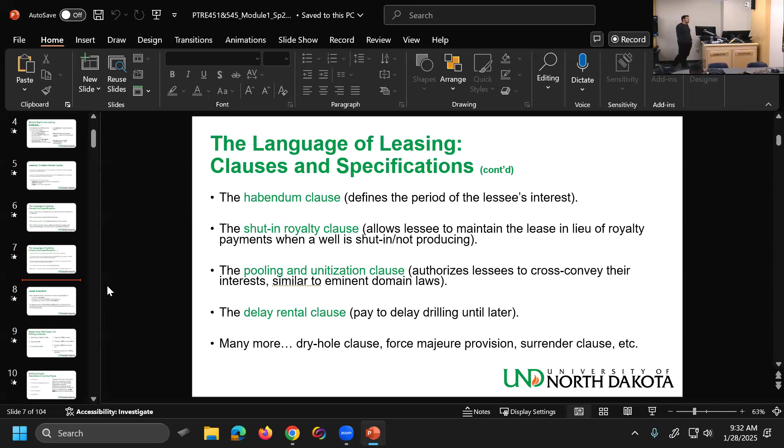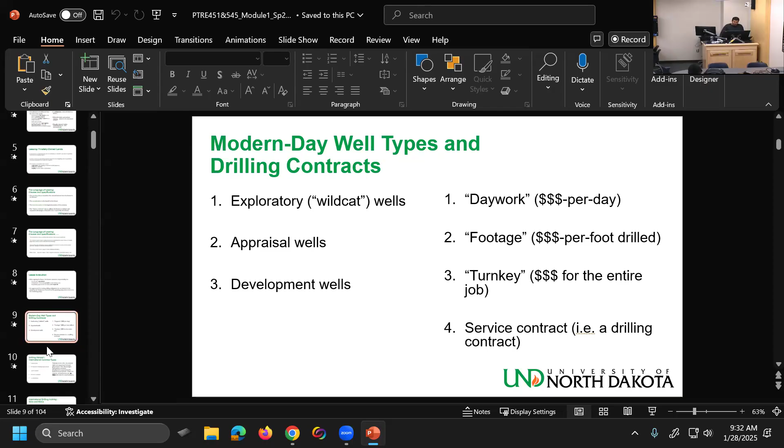Last time we finished talking about contracts. We talked about leasing, then basically international agreements that have to cross borders, and then drilling contracts per se, like between an operator and a drilling contractor, or even a landowner and a drilling contractor. And then we talked about IOCs and NOCs. I expect you to know the difference between the two.

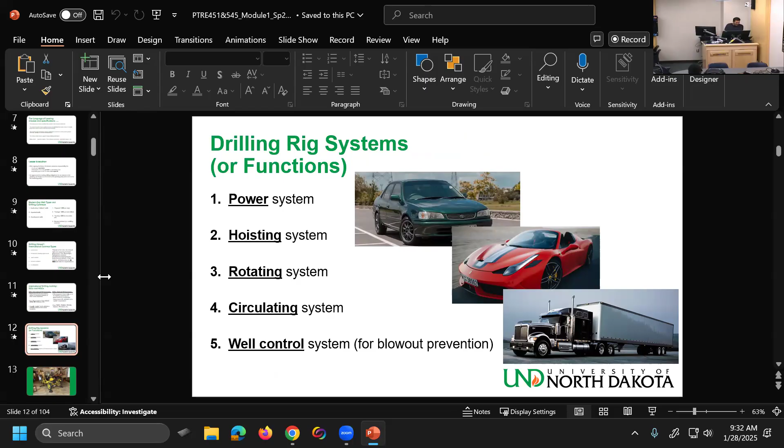And then we started talking about the basic functions of a drilling rig, some things that they all have in common even if they don't look alike. And then we talked about the personnel, the main personnel — that is much more than what this slide has, of course.

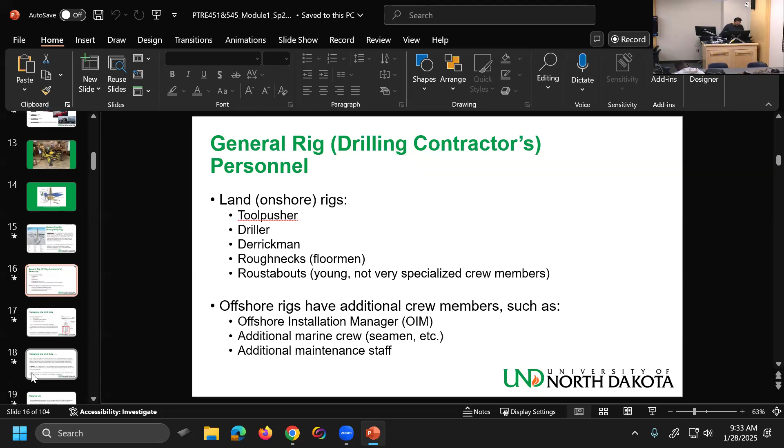And then we talked about the first activities that take place when you're beginning your drilling operation. We said you rig up and then you spud in. Spudding in is an old word — actually, it's not British, it's an American word, I think. But it has to do with potato.

It was really the act of, back in the day with the cable tool rig, lifting the bit and dropping it down for the first time. That was basically spudding in. That's why you spudded your well on, say, January 28th, 2025, and then TD'd it — reached the total depth — on February 15th. TD is like the checkered flag, total depth.

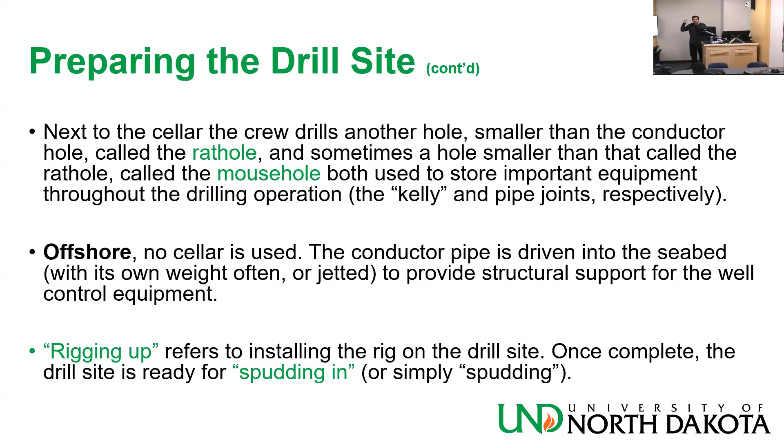Rigging up is when you install your equipment. For some people that work for operators or drilling contractors, rigging up is a big thing, like rigging up the whole rig. For service companies — and there are more than 100 service companies involved even in an onshore operation — rigging up might just mean installing their own equipment, and they tell their boss, hey, I rigged up, everything's okay.

You have the substructure, which is under the ground, basically in the cellar, and is holding up basically the whole rig. Ultimately it's centered over the conductor pipe in the cellar. The substructure will support the derrick, mast, pipe, drawworks, and sometimes even the engines. So it's supposed to hold a big mass — it's a no-joke equipment. It's the foundation on which your rig is temporarily built.

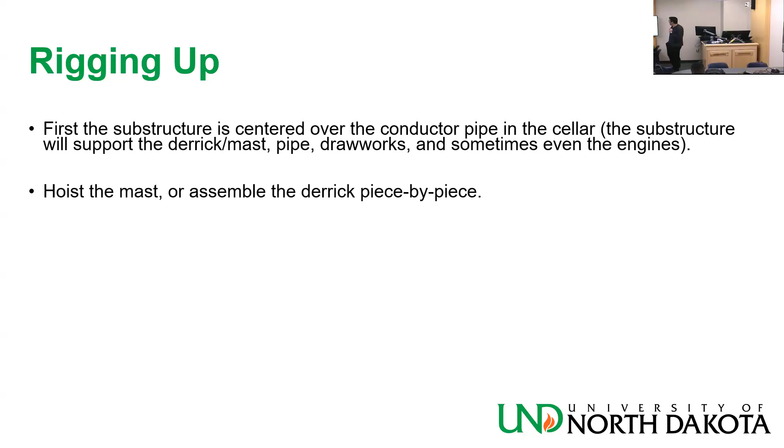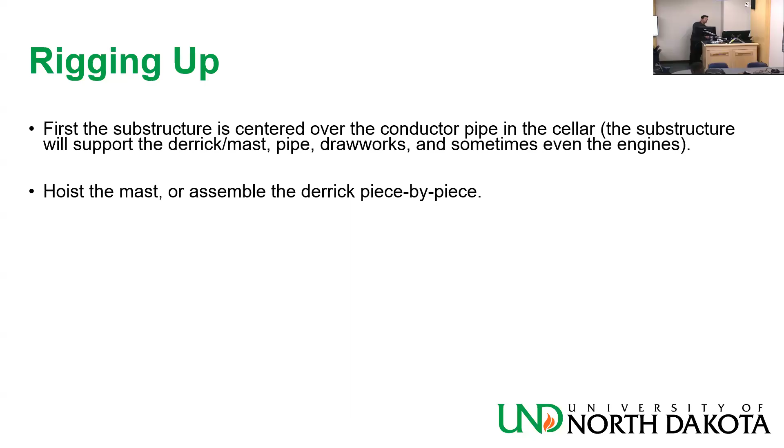You're going to hoist the mast — the mast is a collapsible version of the derrick — or assemble the derrick piece by piece. The mast is basically a derrick that is not a permanent structure. It's easier to transport in the sense that you don't need to move the whole thing — you can bend it down and transport it with a semi, or even break it into several pieces and transport it in containers.

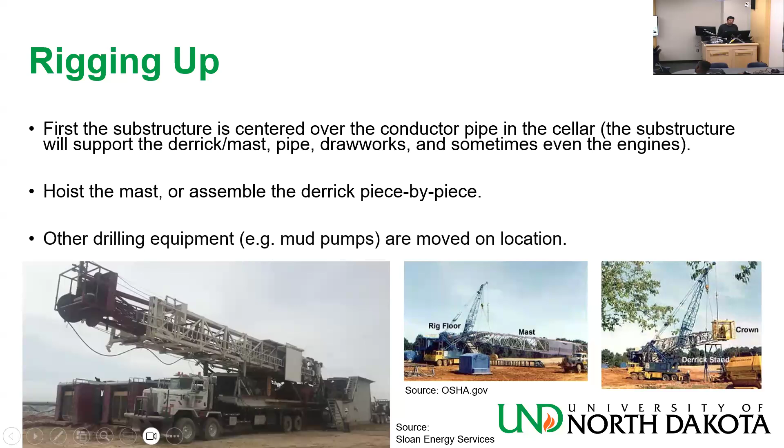And then you have other drilling equipment moved to location, like the mud pumps, the drawworks — we're going to talk about those. Those are heavy equipment, the heavy stuff that you need to take special care of.

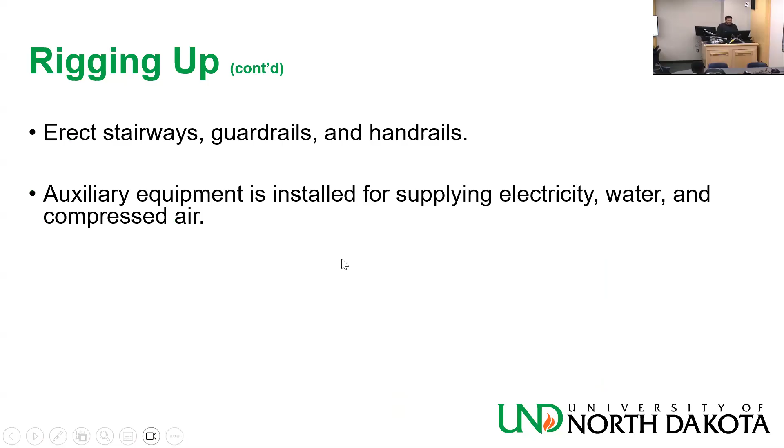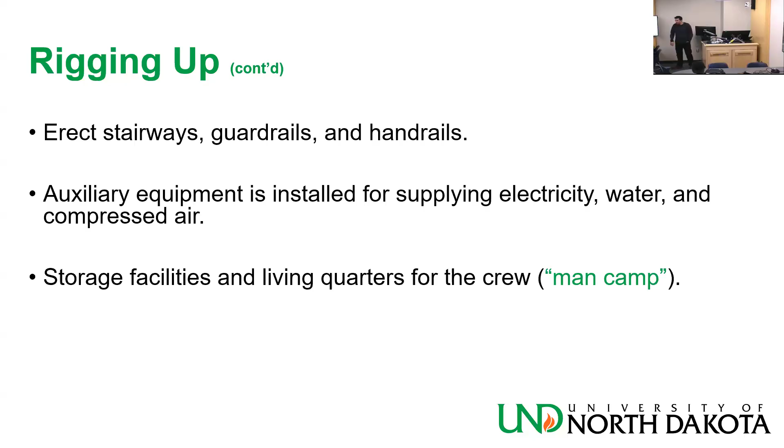You erect stairways, guardrails, handrails — these are small stuff. Auxiliary equipment is installed for supplying electricity, water, compressed air, storage facilities, and living quarters for the crew. They're called the man camp — I used to call it the trailer camp — basically containers that are like apartments inside, several of them.

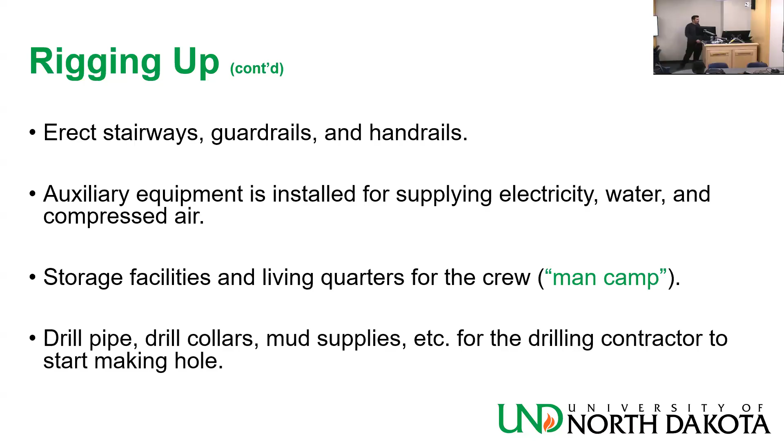Then you bring equipment that you're going to need for the drilling, like drill pipe, drill collars, mud supplies, for the drilling contractor to start making hole. And then you spud in, which is basically the beginning of the drilling operations for a well.

It originated from the cable tool era, when spudding was the act of hoisting the drill stem and letting it fall freely. The force of the drill bit hitting the bottom, hitting the rock, was sufficient to break it, and that was basically the first act of drilling with a cable tool rig.

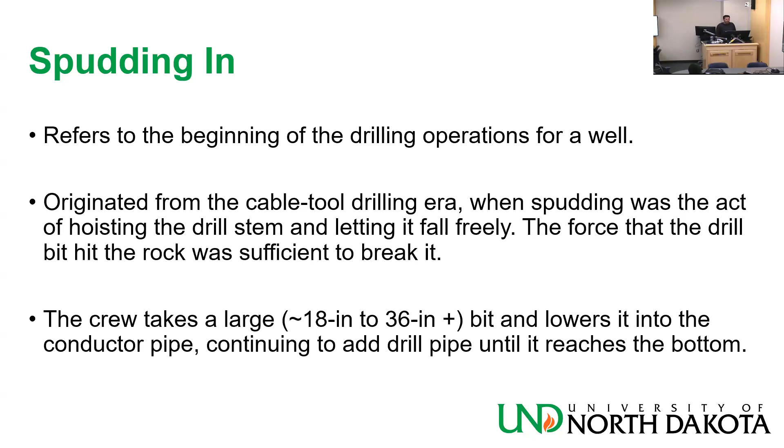Now we use rotary rigs, so it's basically you start rotating, applying weight on the bit — that's when you're spudding. The crew takes a large 18 to 36-inch bit and lowers it into the conductor pipe, continuing to add drill pipe until it reaches the bottom, starts rotating clockwise, and we call this making hole — basically you have a positive ROP, rate of penetration into the earth.

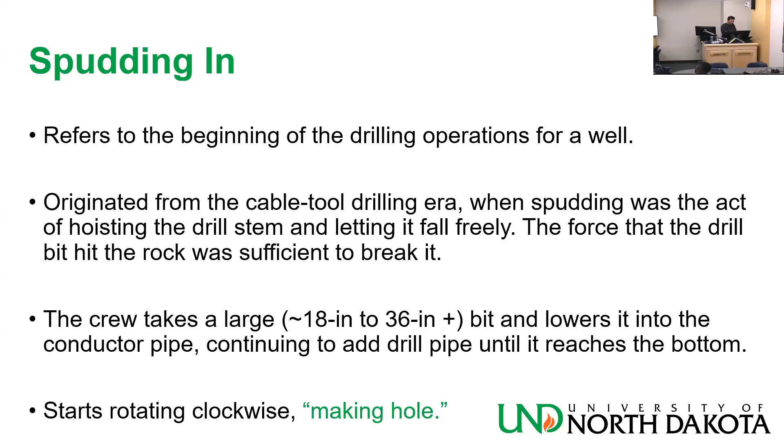Making hole is basically a term that we use for when we are making hole. We are really operating and extending our well. There's some important equipment here that we will talk about.

The derricks are either 90 feet or 100 feet, or 35, 40 feet. The 100 foot derricks are able to pull out of the hole, or even trip into the hole, stands, which is like triples, 3 joints together, 30 each, 90 feet. You're allowed to pull 3 of them together, or pull down 3 of them together. The old 40 foot tall derrick can only do one stand, one joint of 30 feet.

There are joints that are 31 feet, a little bit longer, a little bit shorter, etc., etc.

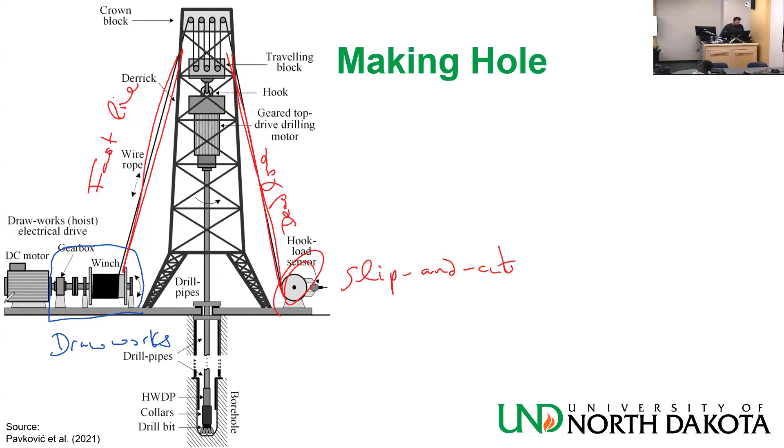If the crew members measure the mud weight coming in, the mud weight going in, and the mud weight coming out, they put it on the screen every few feet or so. So everybody has access to this data on the rig. It happens depending on the operator's or the rig owner's policy, I guess.

Sections of drill pipe above the bit are screwed together in a drill string, connecting the bottom hole equipment to the surface equipment. These are basically the drill pipe joints. One joint is something between 30 to 33 feet.

One stand is 3 joints, so it's something like 91 to 95 feet, can I say? Something like that, can be 89, somewhere there. That's why the height of the derrick is 100 feet or 40 feet.

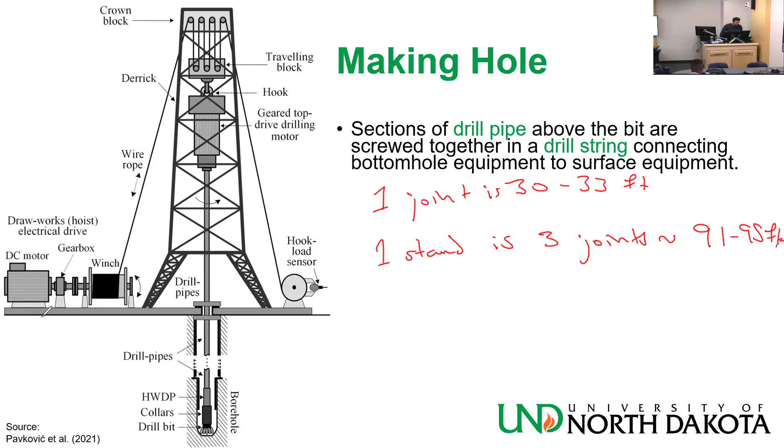The drilling crew keeps adding lengths of drill pipe while making hole. Now remember I told you the rig may have a capacity to pull in, pull out, or run in stands, which is 3 joints together. But when we are drilling, when we are actually making hole, you are going in one joint at a time. The joint that is about to go in is in the mouse hole. It goes from the rack to the mouse hole, and then from the mouse hole down the hole, down the actual well.

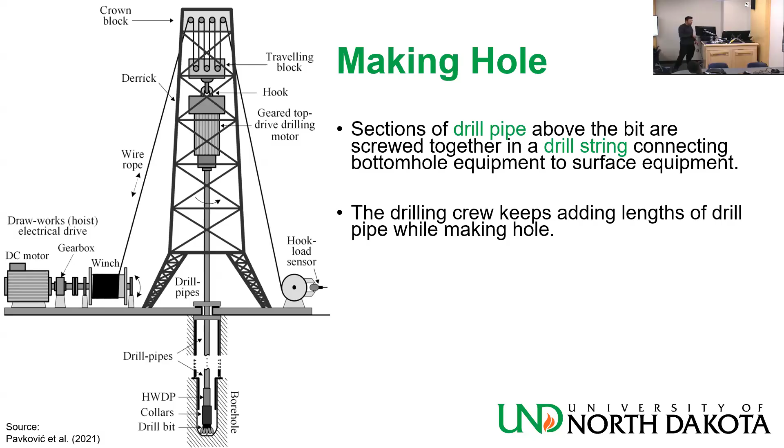Periodically, drilling is stopped and steel pipes called casing are lowered into the hole and cemented in place. Drilling carries on with a smaller sized hole below the casing shoe. So every time you run casing, you cement it, and then you go back in with a smaller bit and drill through that and carry on the well. So it's to your benefit to do as low a number of casing strings as possible.

Basically, you don't want to do many casing strings in the sense of going from big to smaller, smaller, smaller. Then when you reach where you want to produce from, you have a very small hole, and you cannot run anything inside, like a pump. So you need to make sure you don't misplan your well and end up unable to produce, because you need to know what you are expecting to produce, flow rate wise, etc.

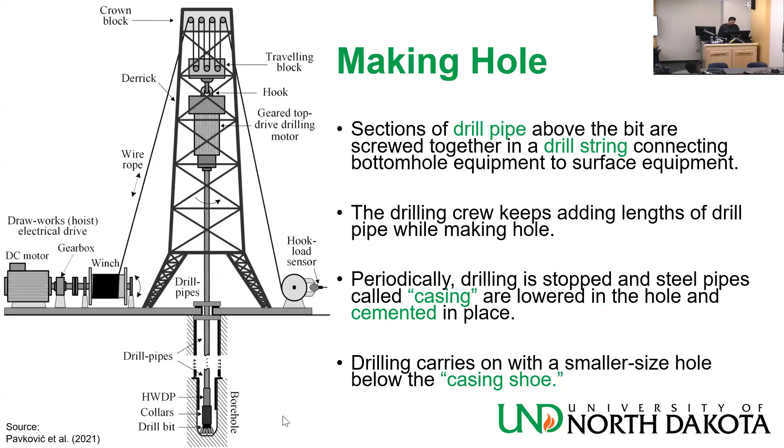There was a well in the Gulf of Mexico, I think it was called the Blackbeard. It had 14 strings of casing inside, so it started very big and ended up tiny at the production zone. When we do the last module, I hope we have time to cover managed pressure drilling, where we'll talk about a technology called dual gradient drilling that helps you offshore use fewer casing strings than you would have otherwise. It's a very cutting edge technology used for that.

The power system. So we're going to look at the power.

Let me quickly ask a question. What influence or what informs the decision of, do I need to drill now, instead of using many casing strings, why not just use one and then change it to the production? Is there a decision whereby you use one and you change it to this?

Have you seen mud windows before? We are going to see this in this module, but do you know about mud windows? Mud windows, mud windows... No? Okay, we're going to see those. We're going to see about casing design.

Basically, it's not completely in your control. You can use mud that has a certain weight. It cannot be lower than this, cannot be bigger than this. And that dictates how many casing strings we are going to use, and also how deep we are going to run each one. We're going to see that maybe in 2 weeks' time, maximum 3 weeks, in this module. It's a good question, yeah, we're going to see casing design.

But there are other things, like these modern day technologies I mentioned, that play with the windows a little bit. What is the variation of your mud weight that's possible? You want the biggest variation you can get. If you have a very narrow mud window, it means your mud weight cannot be bigger than this, cannot be smaller than this, so you have very small flexibility. If you make a little mistake or something goes wrong, you're in trouble. You want to make it as big as possible. There are smart technologies that passively try to achieve that.

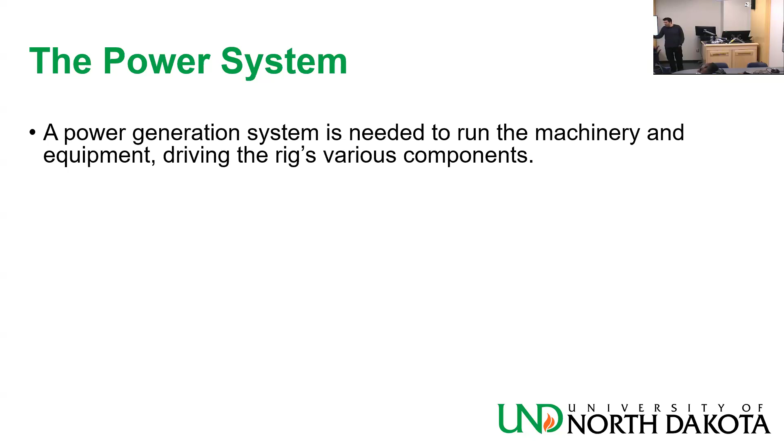In fact, my old advanced drilling professor joined an industry project—it was like the name of his research group, basically. It was called Wider Windows, because they were trying to look into technologies that widen the windows. You want wider mud windows. The undergrads from this class should have seen mud windows before and understand what I'm saying now. They did casing design last year, module 3, I think. But we're going to see that again in this module soon.

The power system. The power generation system is needed to run the machinery and equipment driving the rig's various components, plus auxiliary power requirements for lights, etc. It sounds small and insignificant, but it's important. You need lights, you need clean water, you need a bunch of supplementary or auxiliary stuff. They're still needed, but not necessarily for drilling the hole directly.

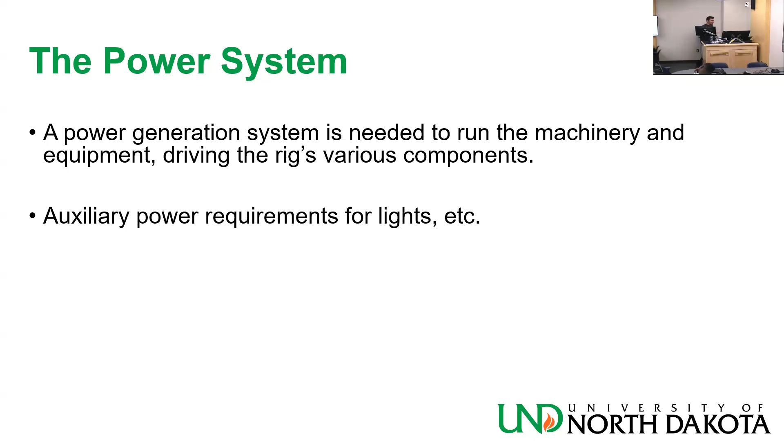But the main things, the two equipment that require the most power on the rig are the mud pumps and what I described earlier, the blue thing, the drawworks. These are the ones that are the most power consuming pieces of equipment on the rig.

Offshore rigs, you are basically on a ship, and you need thrusters, propellers facing against each other, that are used to keep the rig in place. They are also very power intensive. Tremendous total power requirements, exceeding 50,000 horsepower.

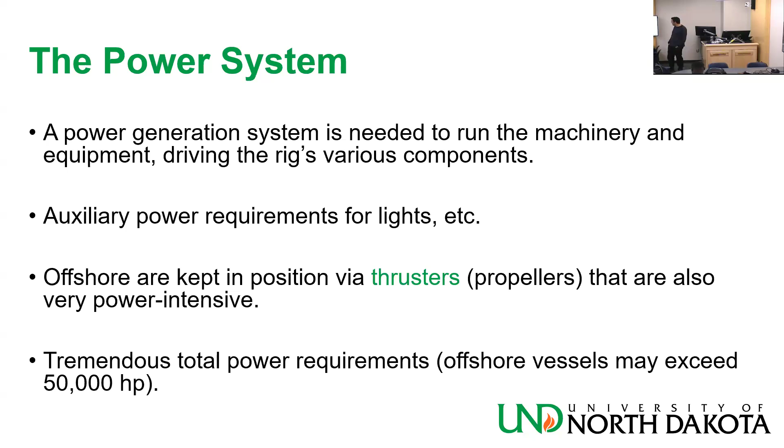Where is the rig's power coming from? We have compression ignition diesel engines. That's the most common source.

If you're familiar, if you drive a gasoline car, the pistons compress the fuel. It mixes gasoline with air, and the mixture enters the pistons. The piston compresses the mixture, then you have the spark plug, which induces current in the mixture, and it makes it burn or explode and moves the piston down, creating motion.

Diesel is a little bit easier in the sense that you compress it and it ignites on its own, basically. You don't need spark plugs, which is good for the people working, they don't need to replace any of the spark plugs.

These days, you have natural gas and liquefied petroleum gas engines that require spark ignition. These are harder to transport than diesel engines, and they are more complicated. Also, when gas is involved, it means having gas under pressure, which is very dangerous. You are in danger of explosion, and other stuff, and they are in general less safe.

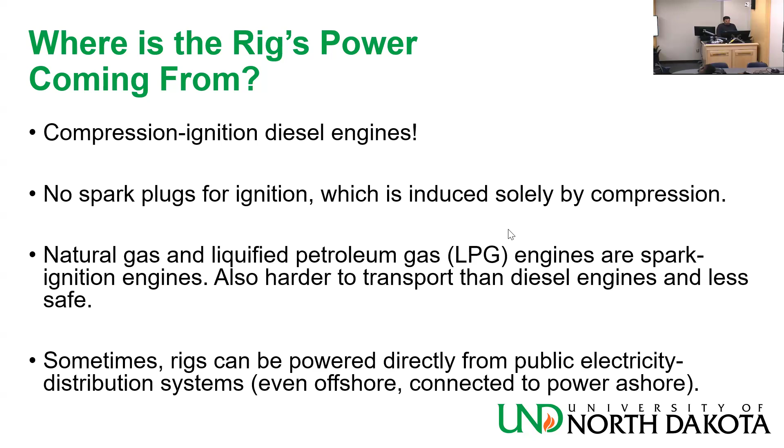Any questions? Feel free to cut me off. Sorry - on a particular rig, is there a situation whereby you have a combination of this power supply?

No, not to my knowledge, because components that are downstream of that will have to be different. Like the transmission, we're going to talk about it a little bit later, but the diesel engine makes chemical energy into mechanical energy, which is motion, or electricity. How do you transmit that down to the rest of the equipment?

You will need some differences there. Generally every rig is designed for a specific type of source. You can have things working on an AC current, things working on a DC current, but generally speaking, it's impractical to have rigs that work on 2 different sources. But I can imagine people designing rigs that can do that at some point, if it makes sense.

I haven't been in one that had that, in fact, all the rigs I have been through, they had diesel engines, to be honest, that I actually worked on. They had diesel engines. And that was in the Permian, either on the West Texas side or the New Mexico side. It was diesel.

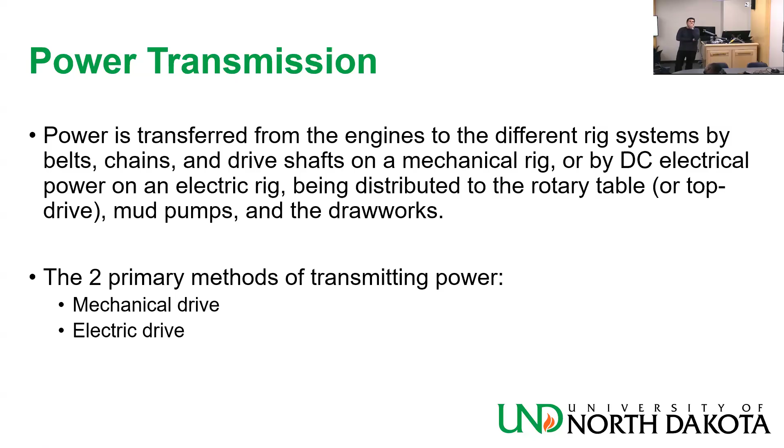There are some disadvantages with a mechanical drive, in that everything needs to be aligned a certain way, because you have pulleys and belts that need to be aligned a certain way. You lose the alignment and you are in trouble. You might not only lose the motion, you might actually cause very big, expensive damage. This is a problem they had back in the day. With the electric drive, you are more flexible, but it's more high-tech equipment that you are dealing with, and the electricity demands are quite heavy.

In mechanical drive rigs, a compound is placed right after the engines, which is the collection of pulleys, belts, etc., connecting to the rig components that require power, such as the mud pumps and drawworks. So you have the engines, the compound, and then everything else on the rig that takes this power, like the drawworks and the mud pumps. The compound is basically where the moving parts are, and this is what needs to be aligned properly.

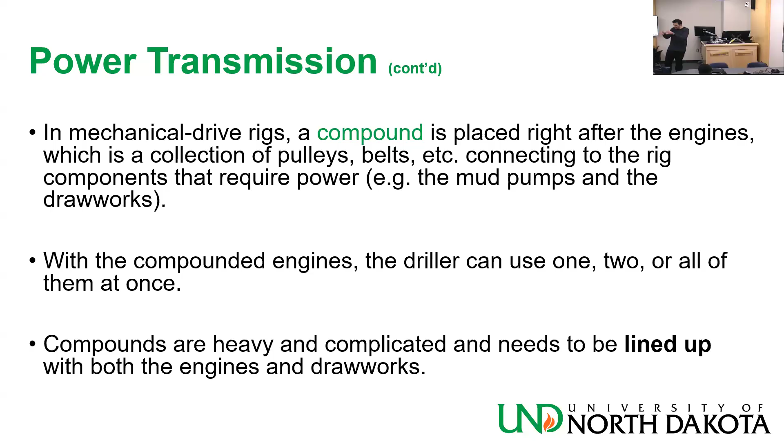With the compounded engines in mechanical drive rigs, the driller can use one, two, or three diesel engines in any combination they like. Compounds are heavy and complicated, and they need to be lined up with both the engines and the drawworks. This is the complication - if you lose the lining up, you are in trouble.

In electric drive rigs, the diesel engines produce AC, alternating current. They burn diesel and produce AC. Everything on the rig works with DC current, direct current. How do you go from AC current to DC current? A transformer, exactly. In the rig we have a whole container with transformers.

It's called the silicon controlled rectifier, and it's a very well air-conditioned room because they need to keep the temperature at a certain point. In the summer, everybody goes and eats lunch in the SCR container because it's cool - everywhere else is hot. If people get tired and it's too hot, they go into the SCR room. It's a very important room, because if something there breaks, you don't have electricity to the components of the rig. But basically, think of it as a gigantic transformer - it takes the power from the diesel to the equipment on the rig.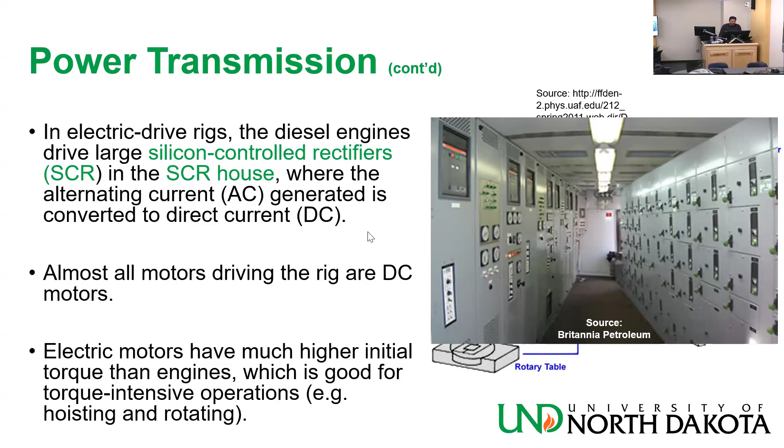And this is how it looks on the inside - the SCR room, very important. Think of it as a gigantic transformer.

I think this might be from Louisiana because this coffee cup is Community Coffee, CC. I think they have a lot of those in Louisiana. No, I haven't been there. I didn't notice that before.

So that's about the power system: diesel engines, mechanical drive or electric drive, this kind of stuff. You create your power, now you need to use it. The hoisting system uses the most power of all the other 4 systems of the rig.

It's composed of stuff we talked about earlier: crown block, traveling block, the drawworks, this blue thing, the fast line that moves, the dead line that stays stationary. And look, we have the dead line anchor, that's where it's grabbed. Then the storage reel here, when you do slip and cut, this is where you do it.

Let me draw for the people online to see. This is where you do slip and cut. And there is a hook here, and basically this hook is the one that moves up and down, and you can attach any weight you want on it. We're going to see what is attached on it, but basically it's capable of lifting and dropping weight.

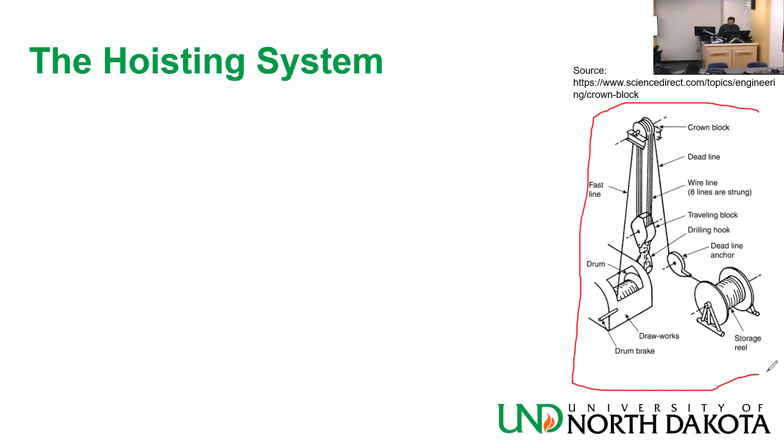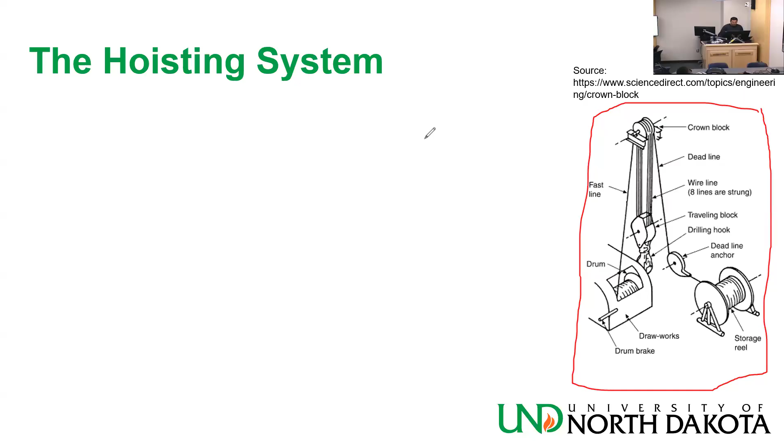This part of the rig we talked about in the first class, we spent time doing something they do in statics, free body diagram and analysis of the force balance on it. It's called the block and tackle. So if somebody tells you about the block and tackle system of the rig, block, I'm writing with the mouse, and tackle, this is what they mean, this part of the rig.

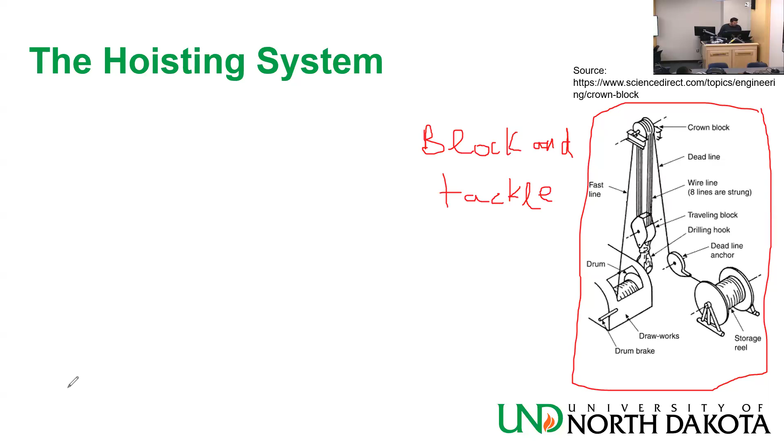And it's about the hoisting system. Block and tackle, basically a drill pipe or casing will be lifted and lowered to complete the well. It's primarily composed of the derrick, traveling block system, and the deadline anchor. The traveling block moves vertically up and down, transmitting motion to the drill string. Floormen or roughnecks can help to safely place these pipes on the pipe rack.

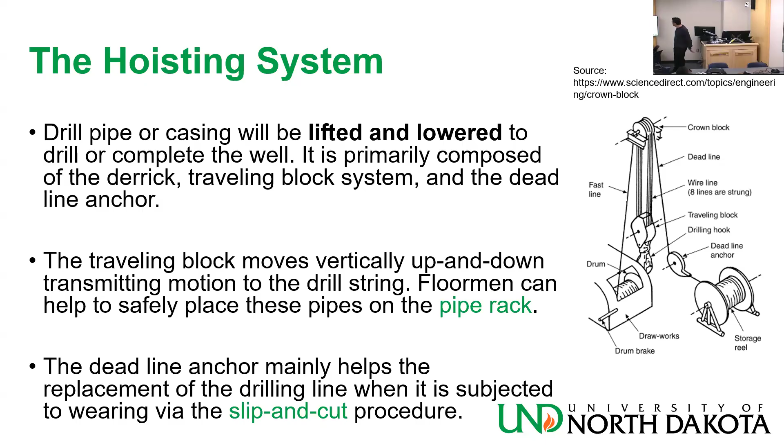We're going to see later what the pipe rack is, it's on the side of the derrick and has the pipes racked on it. The deadline anchor mainly helps the replacement of the drilling line when subjected to wearing via the slip and cut procedure. It's a routine procedure done to prevent excessive wearing that would break the wire rope.

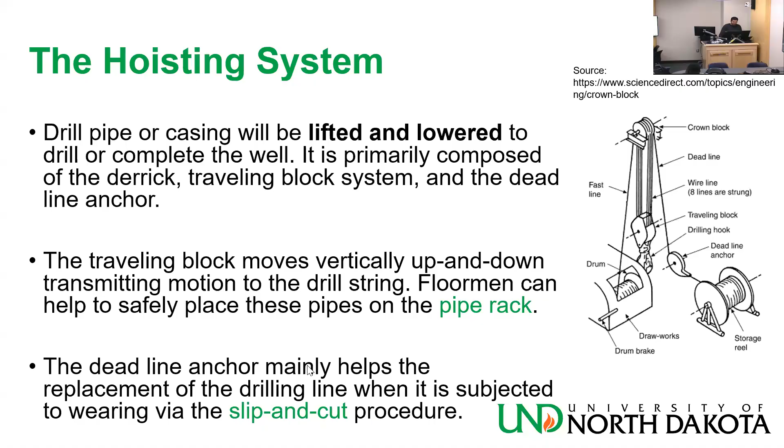This is the pipe rack, and this with the black is the pipe rack. It's important, there are some rigs that you can move it around, and you can move it because of the way the wind blows. It can act like a sail and eventually bend your derrick down.

The wind can be very strong, so you might want to move it. There are some rigs where the pipe rack is movable, and they move it a certain way so that it prevents the wind from breaking the rig. You want to put the narrow side towards the wind so it doesn't basically bend over the entire rig.

This container here, this blue container, is called the dog house. And that's basically the office.

I know some people who were trying to get a job on the rig. They went in and said, how about we get a job painting dog houses? So they were going from rig to rig in the summer. I think they were A&M students and they were painting dog houses. Why did they call it dog house? I don't know, somebody used it as a nickname and it stuck, I guess.

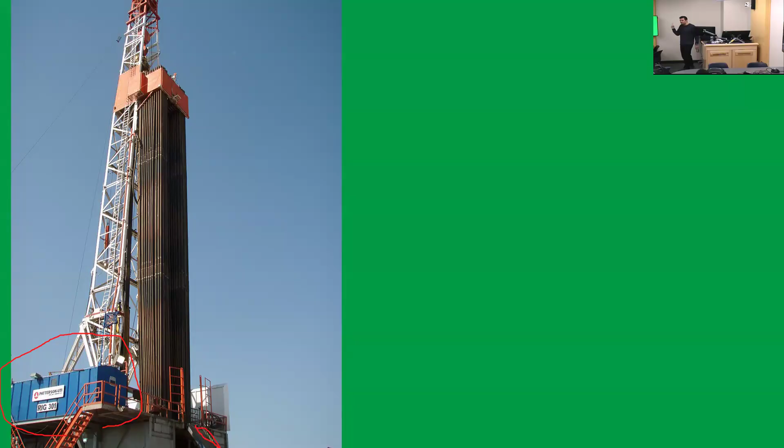Now, this is not a very good picture, but here is basically the runway, it's called the catwalk actually. That's where you lift the pipe up to the rig.

Do you see this thing here, this two-door system, you know what it's called? It's called the V door. There is an old joke on the rig they make to new people, but it's now so famous everybody knows about it: when you get a new worker on the rig, you tell him, hey, go to the company man and tell him to give you the keys to the V door.

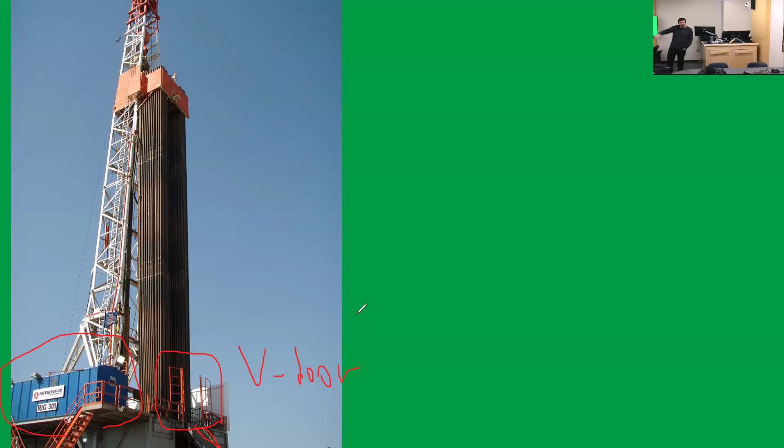You know, it's an old joke. The company man or the tool pusher is going to be busy with a million things, and you're going to tell him somebody's asking for the keys to the window. Everybody knows there is no keys to the window, but they all know about this joke. It's an ongoing joke that everybody knows, so it doesn't work anymore. The windows have a latch, but there's no key. It's an old joke, like they were telling it to us since I was at school. Where is the keys to the window?

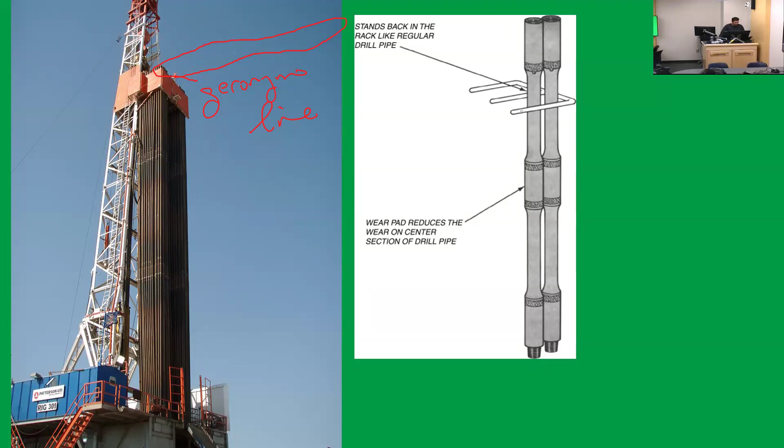So he needs safety, and there is wind as well. You know that they mark the joints, the stands. The reason why they mark them is that sometimes one cannot connect with another one very easily. So they mark one, number 12 connects with number 13. They basically mark them the way, the sequence they got out, so you put them back in the same way. And sometimes they keep that between wells, as in we use this drill pipe in this well in this sequence, we're gonna use it in this well in the same sequence as well.

Let me clean. Now, slips is a very important equipment that you see on the rig floor, and we did see a pair of slips when we went on the field trip. It's basically used when the drill string, which is the connection of all the drill pipes or other stuff all the way to the bit, is not held by the hook. It's a very high weight, a tremendous amount of weight. When you do not have it connected to the hook, how do you keep it from falling into the bottom of the hole? If it falls to the bottom of the hole, it's gonna damage the bit, and it's very, very heavy. So how do you keep it there from not falling in? You have this piece of equipment called the slips, and you put it there to hold it together.

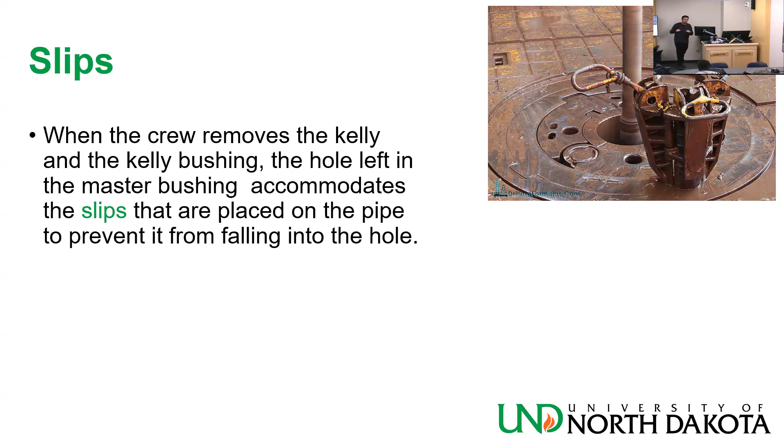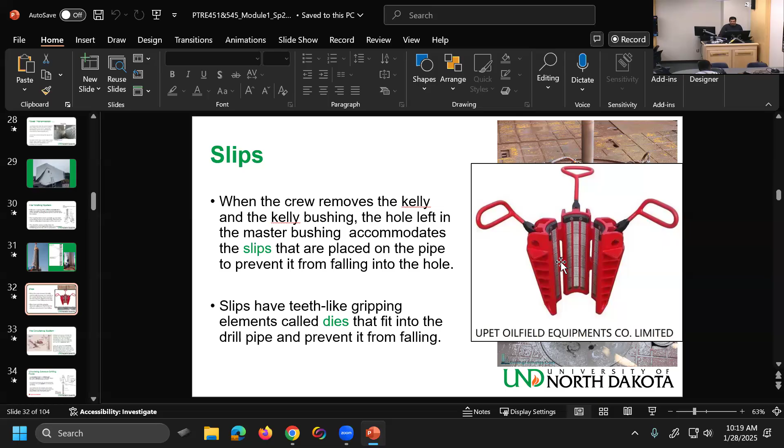Let me make this bigger. I know you cannot see. Okay, now you can see, but how do I make it smaller? So, these are the slips, and then installed at the bottom, this is how they look like. These teeth here are called dies, and they need to be replaced every now and then.

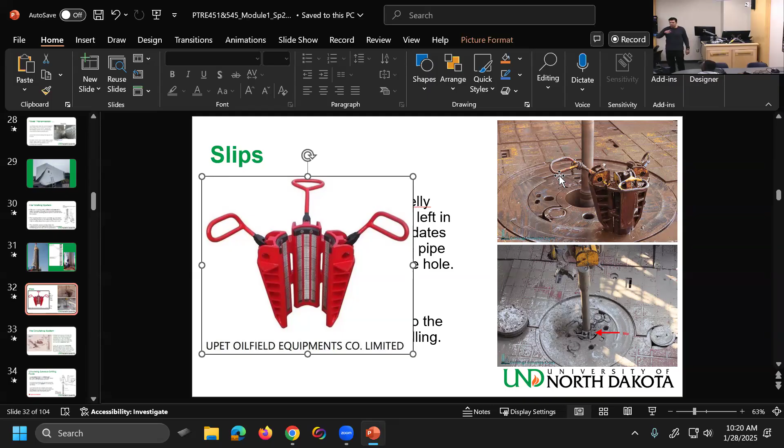Generally, yes. You said they need to be replaced every while? Every some time. You have generally two slips on the floor, and then one spare not on the rig, on the side by the rig crew cabins, so you have one that is working and good to use.

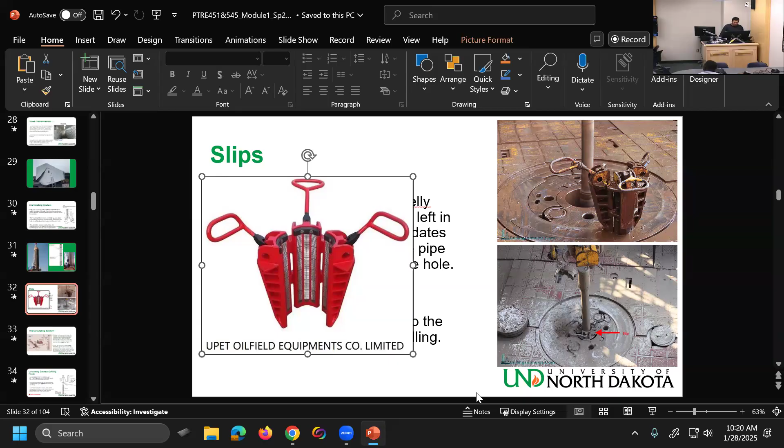There are some slips that need two people to hold them. There are some slips that are small, they're still heavy, don't get me wrong. You need to be very careful when you put them, you don't want your fingers to get stuck there. Be very, very careful. They are disgusting, you don't want to pick them up, it's gonna drain mud on you and stuff. But I mean, they are very necessary.

Now, trick question: you know that hook load is applying a weight or holding a weight. What would be the hook load when the slips are on? Depends how much your blocks and top drive weigh. No? The load will be on the slip, the weight will be on the slip. So what would be the hook load indication that you see on the screen? Zero. That's how you know that the slips are on.

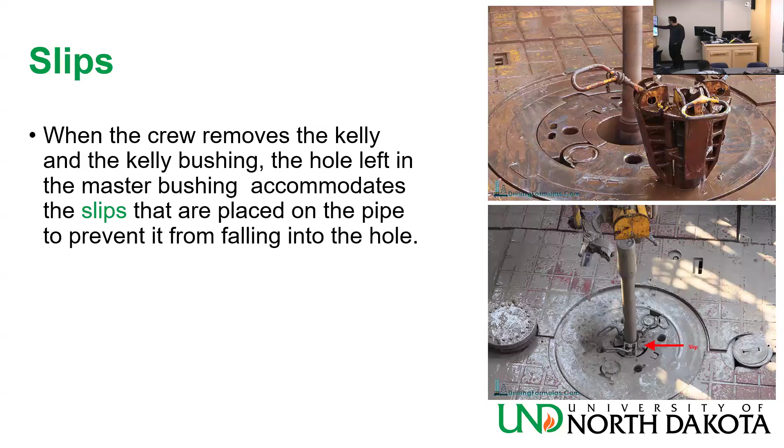If you see on the EDR screen what we call hook load equal to zero, it means there is nothing held by the hook, somebody else is doing the lifting. So basically the slips are engaged. They have teeth-like gripping elements called dies that fit into the drill pipe and prevent it from falling. Basically what they do is deform around the drill pipe, and this is how they create the latching, the engagement there. So because they deform, they need to be replaced every now and then. It's a very important equipment.

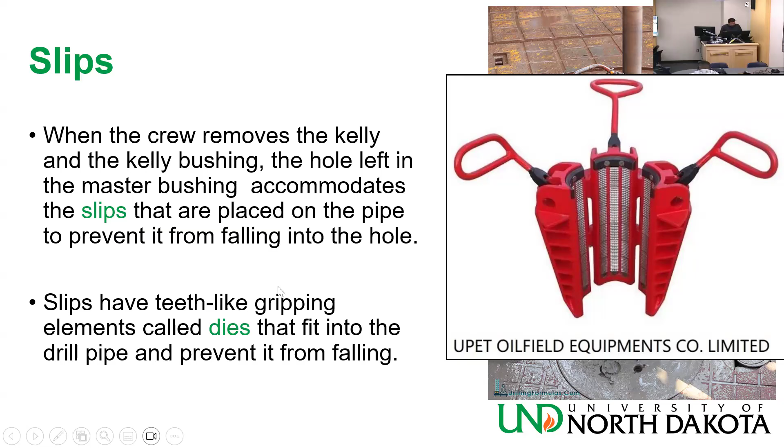Any questions on the hoisting equipment? Okay, this is how you lift and drop stuff, basically. Now, the third system that we're gonna look at, we go through it very fast. I went through it much slower in the undergrad class, module 1. Here I only cover the basics.

It's the circulating system. This has to do with basically mud circulating throughout the well, down the hole and up. You have the mud pits where it's clean mud, it goes through the mud pits into the mud pump, gets pressurized, goes down hole, up the annulus, and then it's cleaned up by passing through various equipment, and then becomes clean again and gets back into the mud pits.

Oh, we have another student online. Hello, Tito.

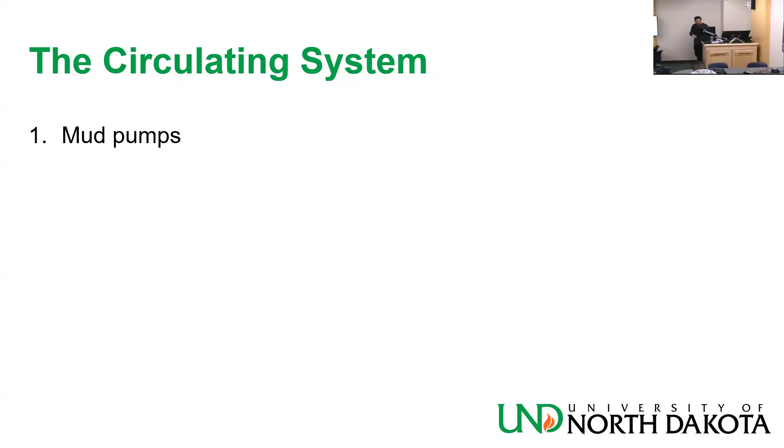Okay, so let's see the system. The circulating system's main components are the mud pumps, the mud pits, mud mixing equipment, and mud contaminant removal equipment, basically the cleaning equipment of the mud.

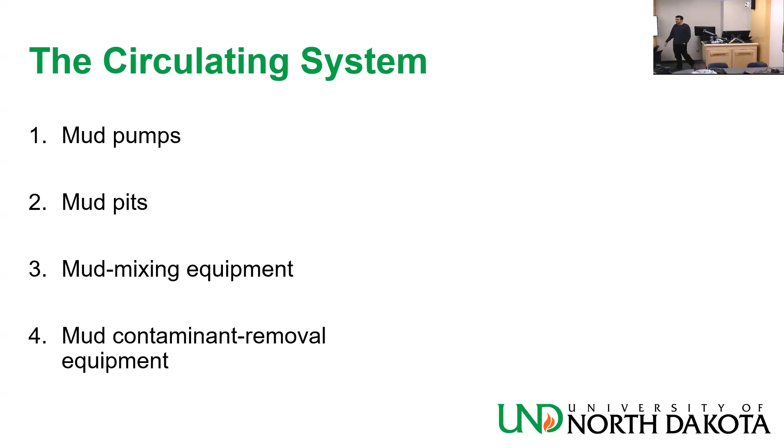And it looks like this. I'm not a big fan of this schematic from my old university. It has some things that are wrong. I think it was done by academics, purely academics, but it does the job I want to do for now.

Basically, you have the mud tanks. Let me move this. You have the mud tanks - this is where there is clean mud, ready to go downhole. It gets picked up by the suction line of the mud pump. It's important to be clean because you don't want dirty mud to get into the mud pump. It's going to damage it. It has particles, it's going to abrade it, it scratches it. You don't want that.

Then the mud pump applies pressure. It pressurizes the mud. So this discharge line is a high pressure line. The mud leaves the mud pump at a very high pressure. And then it goes through the standpipe.

The standpipe is taped onto one of the legs of the derrick. The derrick has 4 legs, and the standpipe is taped onto one of those legs. It's a high pressure line again, and you have a gauge there, and you measure what we call SPP, standpipe pressure. That's the last good measurement of pressure you have before entering the well.

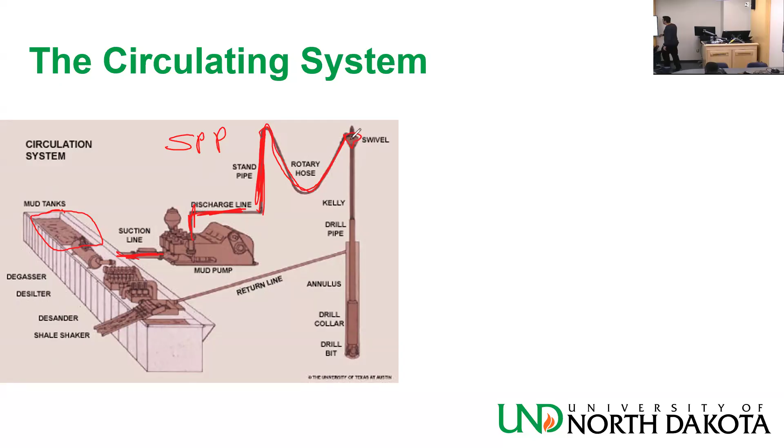Then you go through the rotary hose, which is like a loose pipe, and it's attached onto the swivel. The swivel is something that rotary rigs have that basically allows rotation underneath. Everything below the swivel rotates, everything above it does not rotate. This is held by the hook load, by the hook of the traveling block. Now the rotary hose is attached to the swivel. Remember, the swivel is stationary, doesn't move, doesn't rotate. Everything below it rotates, so you want the mud to enter the swivel because that's stationary.

And there is a pipe in the swivel called the wash pipe. This is where the rotary hose connects to the swivel. This wash pipe very often needs replacement - it can leak. Remember, you have high pressure mud at that point.

So the high pressure mud goes down the drill pipe to the bottom of the well through the bit jet nozzles, then goes up through the annulus, carrying the cuttings, any kind of dirt encountered downhole. It comes out through the annulus, and at this point, you are back to atmospheric pressure. So you went from high pressure at the standpipe to atmospheric pressure out of the hole.

And then, because you're at atmospheric pressure, it's not moving - you need help to make it move. So you ramp it down through the return line, which is inclined to use gravity. And then it goes through a series of equipment that clean it up.

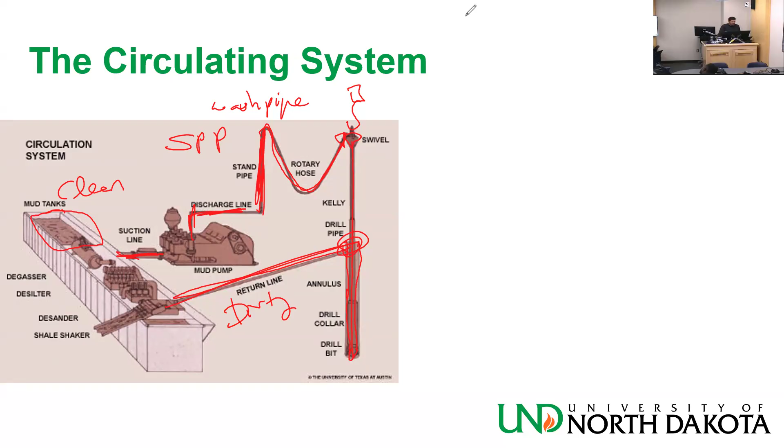One thing I wanted to say is that the mud pump is shaking, right? By operating, it moves up and down like it's shaking. The whole thing is trembling. If you had a mud pump here and it was working, you would get a headache. Same thing with shale shakers - they are vibrating screens basically. There is a lot of vibration going on, so you need to control it because there are moving parts that you don't want touching each other. If they touch each other, there is friction, a lot of problems.

So what it does, it dampens the pulsations. It lowers the vibrations. It basically has a diaphragm with one kind of fluid above it, like water, and then basically the mud is below it, and it dampens, it slows the vibrations down. This is how it works. But it's very distinct. If you see a mud pump, you are going to see the pulsation dampener.

It's rare, I've never seen a diaphragm of a pulsation dampener needing replacement, but it can happen.

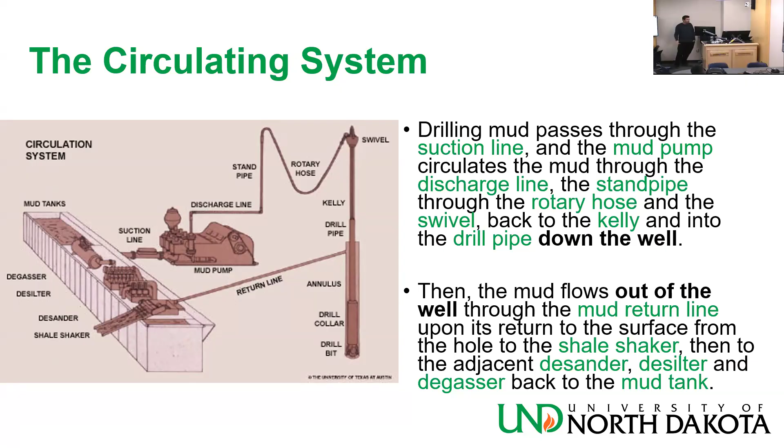So the mud flows out of the well through the mud return line. Upon its return to the surface from the hole, the shale shaker, then the adjacent desander, desilter, degasser to clean it up, and back to the mud tank. Not necessarily in that sequence. Now, sometimes you deal with gaseous drilling fluids.

It's a bit of a niche, but you may be using aerated mud. In that case, there are some changes to the system. You no longer have a mud pump, you have a compressor. Remember, you are dealing with gas now, right? So you have the standpipe again, and everything else is the same.

But then when you enter the well, it goes in and out. When you exit, you are not at atmospheric pressure. You are at a pressure higher than atmospheric pressure. So you have what we call a rotating head, because you don't want the gas to escape there.

It's a hazard, you can have a flammable situation. Somebody, one of the roughnecks, may accidentally brush metal against metal, make a spark, and then suddenly the whole rig floor catches fire. You don't want to die. You want to direct it through the blooey line to a place where it's burned properly and safely, far away from everything.

So there are some differences. You have a rotating head below the rig floor, preventing the escape of gas before it enters the drill string. Gas returns from the annulus and vents through the blooey line to the reserve pits, at a distance away from the rig. It can even burn at the end of the blooey line, which is the example I gave earlier. You don't have to destroy it, but you could if you don't want it to be replaced.

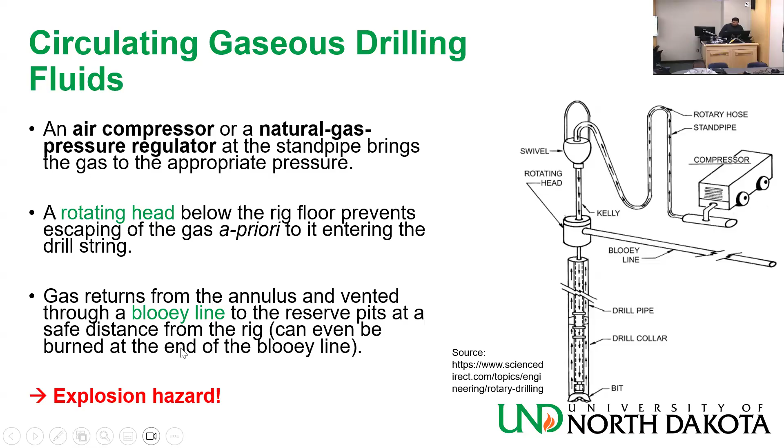And obviously, you cannot have a mud tank because it's going to be open to the atmosphere. You need something closed so that you don't lose the gas. Generally, like I said earlier, if you have gas, you have things with high pressure, and they are very dangerous. They can explode anytime. You may have trapped pressure that you don't know about, and things can happen. Be very careful. Explosion hazard everywhere, everywhere in the system basically.

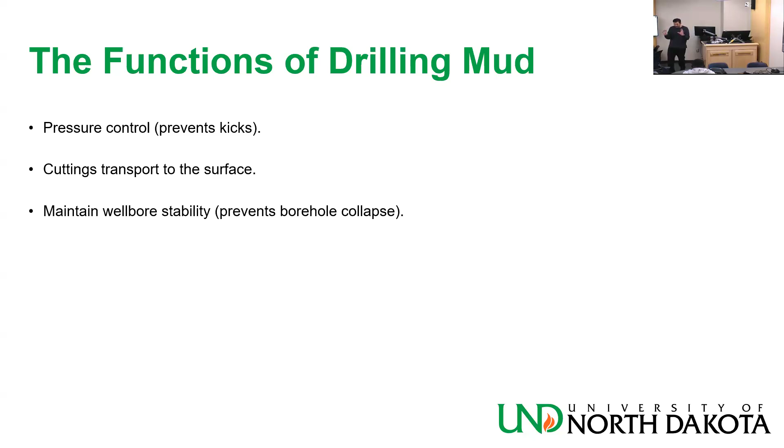I need to maintain wellbore stability - basically make sure my hole doesn't collapse on me, because if my hole collapses, I'm in trouble. This is similar to pore pressure concepts from geomechanics - it's like you have a value, and if you go below that, you're in trouble.

You also want to prevent formation damage, which is something we learn about in well completions. Basically, you don't want to damage the reservoir region around the well, because then the production or reservoir people would be mad at you. There are a lot of ways you can damage the formation - sometimes you drill and damage it, complete and damage it, produce and damage it, stimulate the well and damage it. It's very easy to damage.

But sir, is it inevitable that when you drill, you cause damage - is it 100%? Well, you do damage regardless, but you can mitigate it as much as you can. Sometimes there isn't much you can do about it - even pipe dope causes damage too. Yeah, these are things that are inevitable most of the time.

You also want to cool and lubricate the drill string. You don't want the temperatures to go too high, and you don't want them to be too low - you may have salts that can form when the temperature is out of control.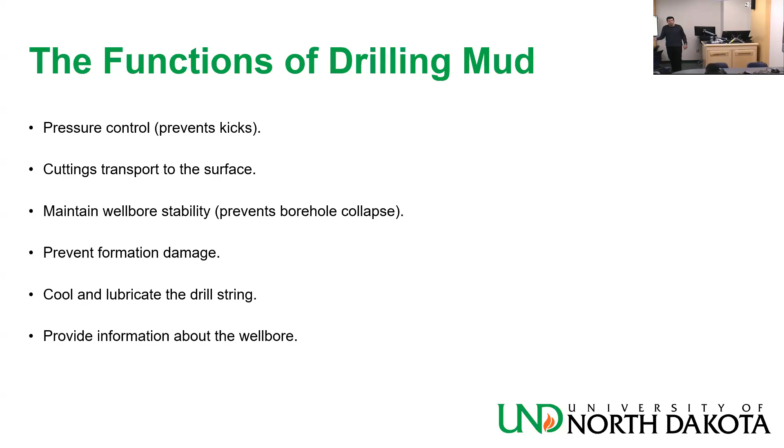Also, you want to provide information about the wellbore. Many times you have signals transported through the fluid by piezoelectric transducers, which create pulsation waves in the mud and transport signals. For instance, if you're drilling with a logging-while-drilling tool, how does information from that tool come to the surface? A lot of times it's with mud signals traveling through the mud.

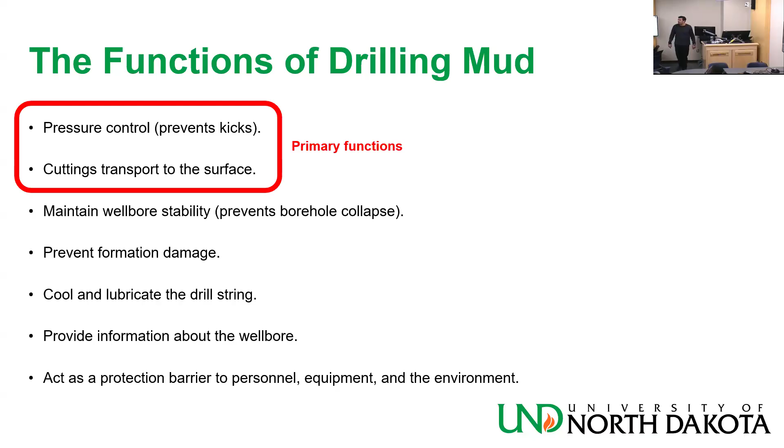And you want the mud to act as a protection barrier to personnel, equipment, and the environment. Now, from those seven bullet points, the first two are the primary functions, so I want you to know these especially. The rest are secondary or tertiary functions. Any questions about this?

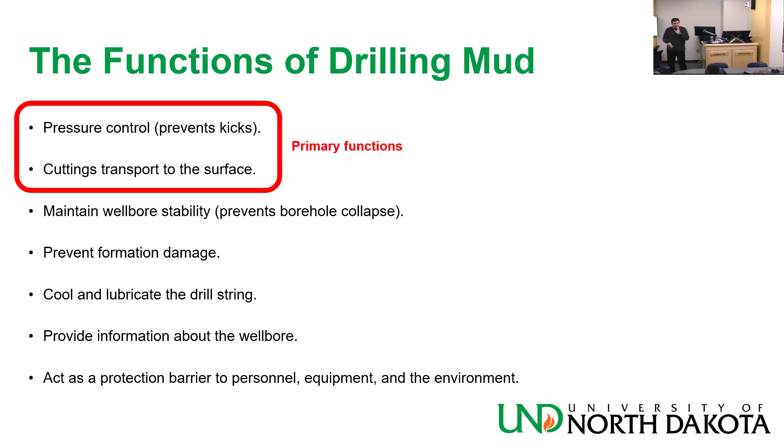Okay, so this is what we want to achieve - these are our objectives using the drilling mud. Now we want to manipulate the properties of the drilling mud to achieve those objectives. So how are we going to do that? What properties are we looking at? The first one is one you're already familiar with - the density, the mud weight, basically.

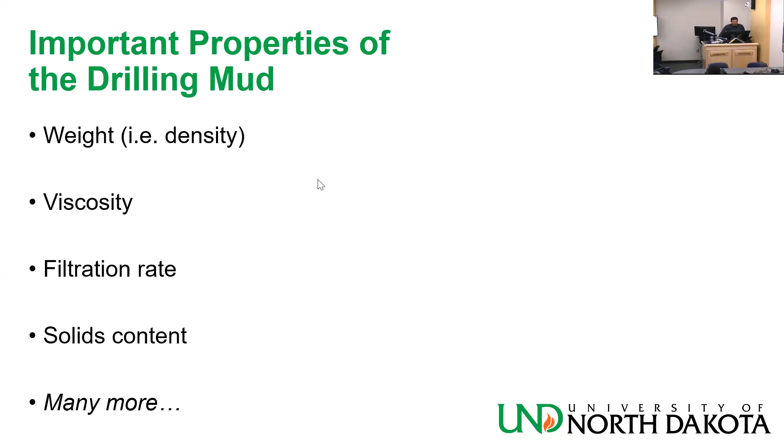The second one is the viscosity. The third one is the filtration rate, solids content, and many more. You have somebody called a mud engineer who is responsible for this stuff.

This is a very experienced rig crew member, and he has people working under him. So what he does is say, okay, our mud weight needs to be this value, our viscosity needs to be this value. So this is the recipe that we need to mix. And he tells people, mix 32 sacks of barite with 880 gallons of water, blah blah blah. He tells them, in layman's terms, what they need to do, and they go out and do it for him.

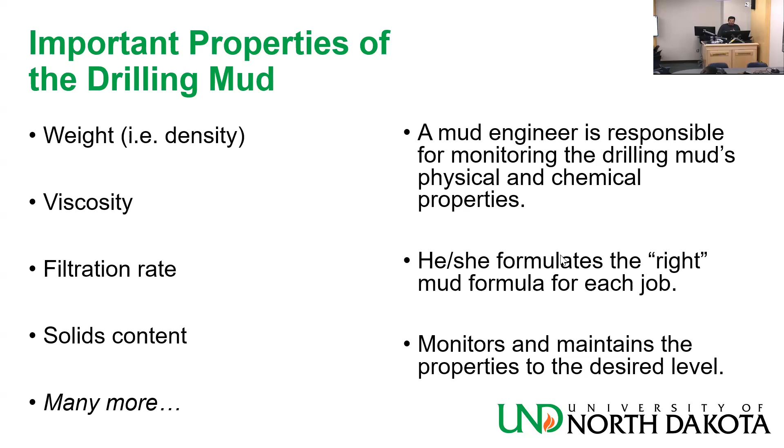He or she, it's going to be a he, formulates the right mud formula for the job, and he monitors and maintains the properties to the desired level. He is responsible for the mud to be at a certain level. So every time there is a stuck pipe problem, when you get stuck, the first fingers will be pointed to the mud engineer. And the mud engineer will say, but we are getting good returns, why are you blaming me?

So that's the stuff about the circulating system so far. We're going to get deeper later on.

Are they waiting? They can wait 5 minutes. Yeah, sorry, the time was... yeah, 5 more minutes. Oh my God, we have questions in the chat, sorry, have to run things. Okay, somebody left.

The rotating system is the last one. Well, the second to last one we are gonna see. That's all the equipment that is used to turn the drill bit. You know you are drilling 10,000 feet underground, rotating a bit 10,000 feet below your feet. So how do you do that? How do you transmit this rotation?

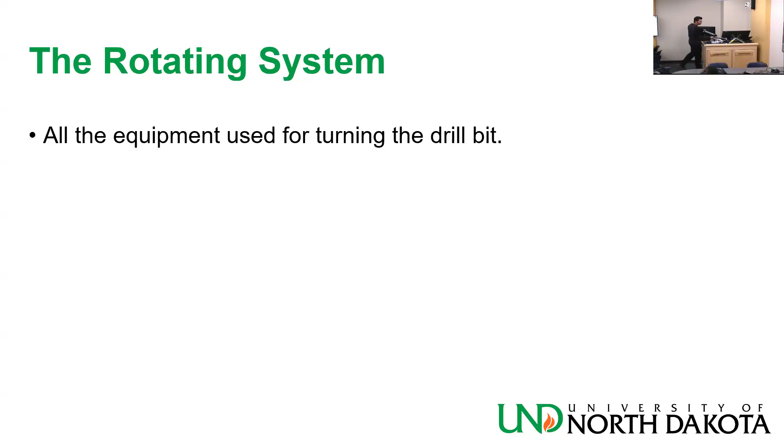The answer is through the drill string, those joints that we talked about, or those stands. If you rotate the top, it rotates the bottom. The bit is attached to the bottom, but you need to provide the torque with two ways.

One is the traditional way, which is the rotary table, also known as the Kelly rig. That's the traditional type of rig. You won't find one of those in Williston. You will find some in Permian, but those are old style. That's the one we saw earlier with the swivel. And I said the swivel doesn't move, everything below it is moving.

So the question is, where is this motion originating from? The answer is from the rig floor. They have what we call the rotating table on the rig floor, which is rotating. So you pass the drill string through the rotating table, it rotates, and it makes the whole drill string rotate. Everything below the swivel is rotating, even the bit downhole.

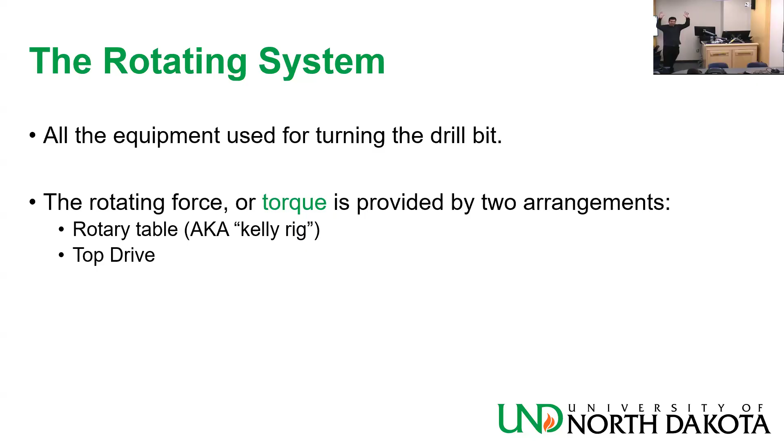The other type is top drive, which is basically a swivel specially designed to provide the rotation. So you don't have a rotary table at the rig floor, you have the swivel rotating. It's called the top drive, and it doesn't look like a swivel, it's like a big machine, very heavy, that moves up and down. This is the more modern kind. All the rigs in Williston are like this.

Rotation is transmitted downhole to the bit through the drill string or drill stem, consisting of the drill pipe, what we call the bottom hole assembly or BHA. That's a collection of heavier drill pipe called drill collars, and then some other specialized equipment like logging while drilling tools, some like rotary steerable systems to create direction in your well, and some expensive equipment. It's called the bottom hole assembly, and then the bit. So if somebody asks you, what does the drill string or drill stem consist of, you'll say three things: drill pipe, bottom hole assembly, and the bit.

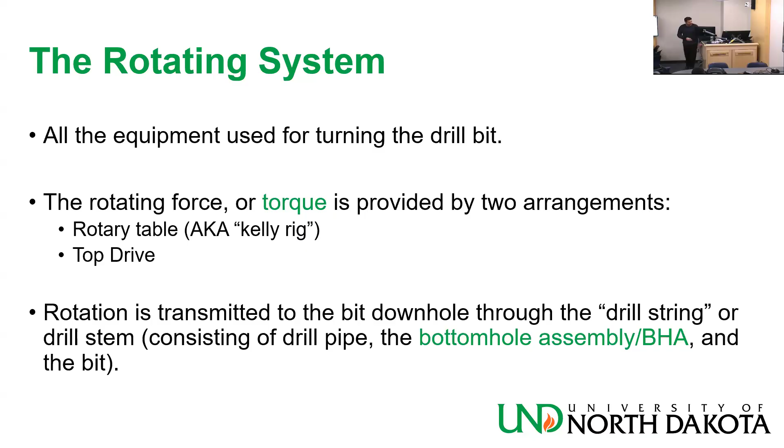And we will see those, I guess, next time. I don't want to get into too much detail today, but we are going to see the rotary table main components next time, and then the top drive, and then we are going to proceed with some other stuff, getting deeper and deeper.

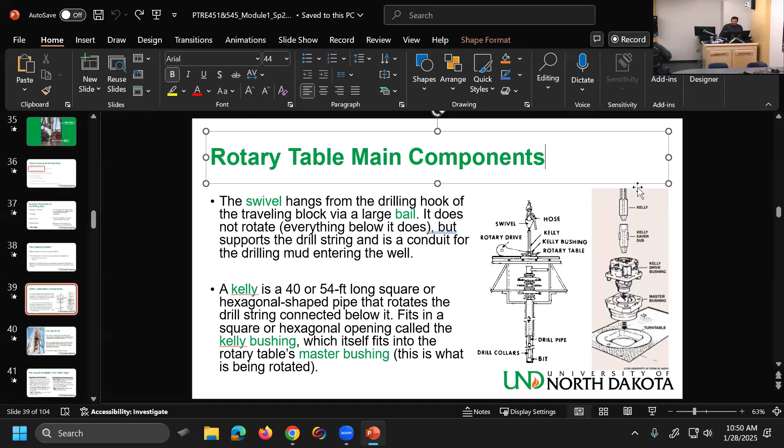Be careful, because when the temperature is close to freezing, a liquid layer is on the road, on the ice, on top of the ice, and that's what makes it dangerous. If it's above freezing, it's good because it's dry. But then if it's too low or too high, it's good. When you have that in between, that's the dangerous part. Takes away from the friction between the tire and the road. And thank you guys, I will see you on Thursday.